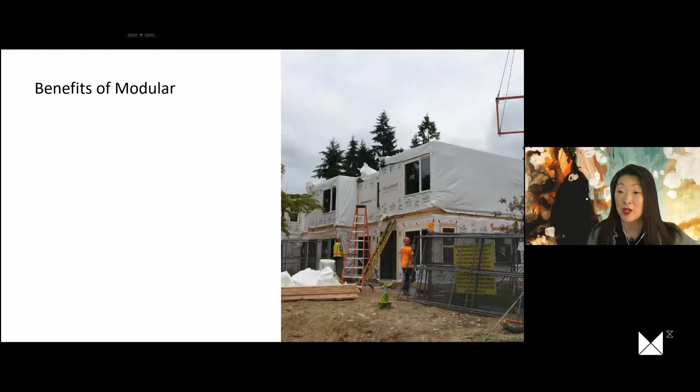And then really quickly, I know many folks watching this might know the benefits of modular, but for newcomers, especially those advocating for new types of construction for delivering affordable housing, there's definitely reduced permitting costs in that you're paying just for the Labor and Industries permit and not the building permit itself. You'll pay for site costs and that sort of limited cost. There is a predictability of construction cost in general, and we'll talk a little bit about that. The construction duration, I'll share with my project, can be dramatically shortened, which means you can house people more quickly.

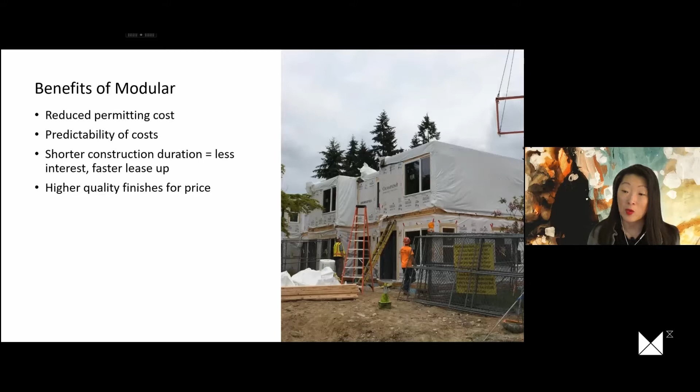The quality of what we got for the same price was considerably higher. I'll try to point those out. And then there's better sound insulation between units. Side to side, in multifamily housing, the sound insulation in site-built is quite reasonable. Top to bottom, the sound separation is not great in multifamily housing, and modular is actually able to achieve much better sound isolation. Controlled environment, so the materials are not getting wet, so there's no dry out period, there's no impact to indoor air quality for the residents.

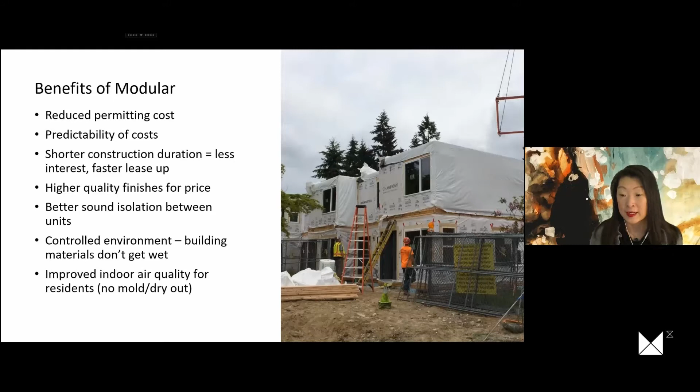And then in terms of affordable housing, I think one of the biggest benefits is the wage rates. I know in our state and city, prevailing wage rates can be quite high. And when you apply those to large scale projects that are $20 million or $10 million, that can eat up a large chunk of the budget. And so the modular companies are able to use their own rates based in the factories wherever they're located.

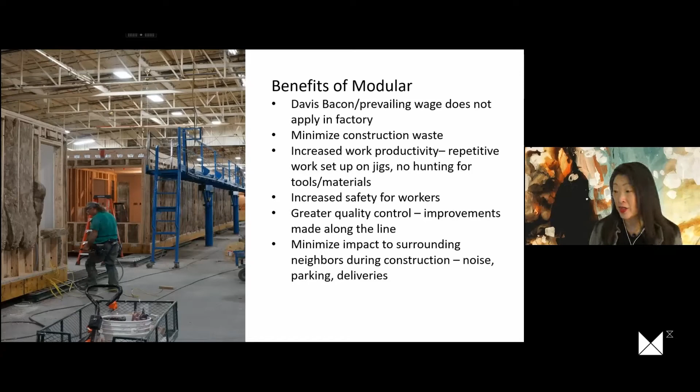So this is the project that I'm going to share with you. It's the Kirkland Avenue Townhomes in Renton, Washington. It is 18 homes, most of them townhomes. There's 4 flats, and they were for families that were earning less than 50% of the area median income. 2 of the units were for previously homeless veterans, and 2 of the units were barrier-free or accessible.

So one of the key things about this project is that from the beginning, we knew that this would be modular construction. The owner had a strong desire to do that, and so we were prepared and ready. The standard dimensions for trucking is what we worked with. These were the ideal numbers given to us by various modular vendors and trucking companies. So ideally, we would be working with units that are 14 to 16 feet wide, a planning dimension of 30 to 35 feet deep. And we did this because we knew these were going to be stacked units, and we weren't doing a double loaded corridor situation.

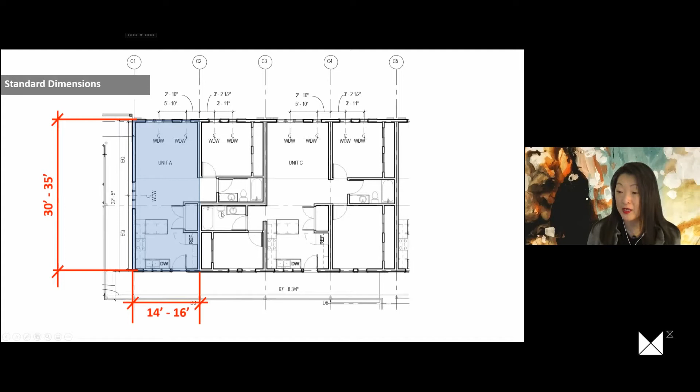And so we knew that if we put 2 of these units side by side into a single trailer width, then we could reduce the costs of shipping. So we were trying to maximize one load. So we designed this into bays. There's a living bay and then a bedroom bay. And in this case, this is a 1-bedroom unit nested in with a 2-bedroom unit, but they're all made up of individual bays that are, I think in our case, 14 by 30.

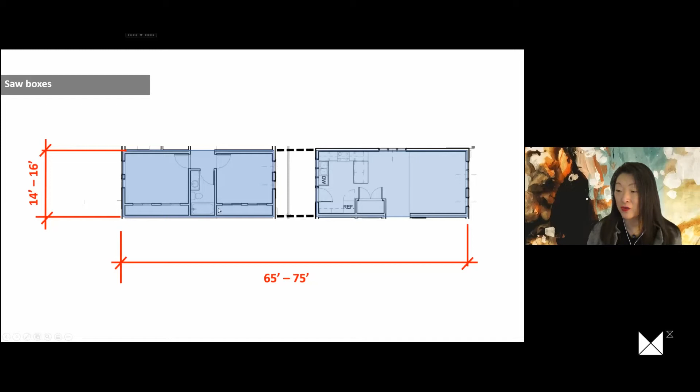So this is how the saw boxes were put together, side by side, kind of in a linear format. And these were actually 1 unit. So this unit could stack on top of this one. This was the flat, not the townhouses. And then these dashed lines are the portions that get sawn away. So we had about a 68-foot dimension for ours. So this is the living module, as I mentioned before, and then this is how they could get combined into a 2-bedroom. So this is just kind of a simple planning exercise.

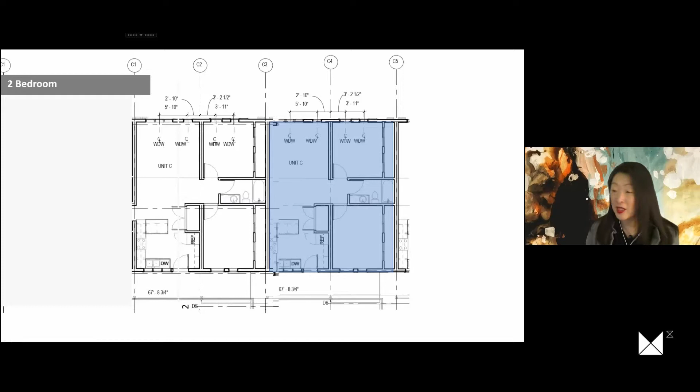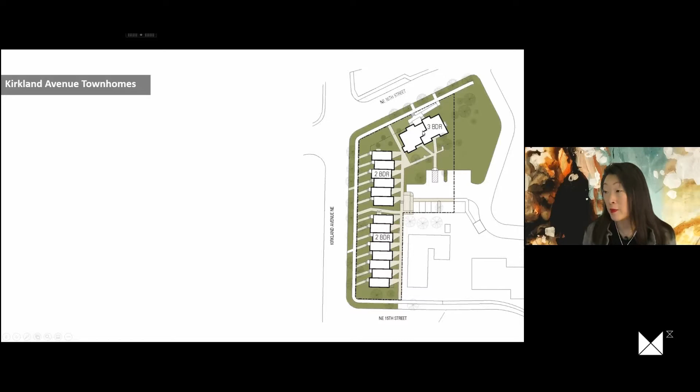Got ahead of myself and shared the way that those nest together. This was our site, a little L-shaped site that was at the corner. So the townhouses face Kirkland Avenue, which is the main street, and then 16th was a side street. And the 3-bedroom units were stacked, and the stacked flats were on that 16th Street side.

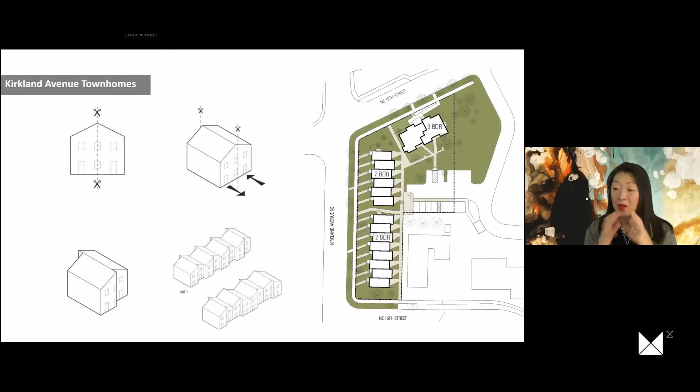Architecturally, the concept was to create a sort of simple archetypal house. And then we sort of split it down the middle and modulated. We thought the width of these units being only 15 feet wide or 14 feet wide was too small to do a series of gables, one next to the other. So that was how we achieved sort of that familiar residential character, and yet we pushed the facades back and forth to articulate the individual homes.

In terms of documentation, because this was a public housing authority that we were contracting the work through, they had a procurement requirement to go out for competitive bid. And so while I wouldn't recommend this for all projects, in the case of ours, we needed to do competitive bids. So we made it very clear in our documentation what was field work and what was in the factory. 90% of the work was going to be done in the factory.

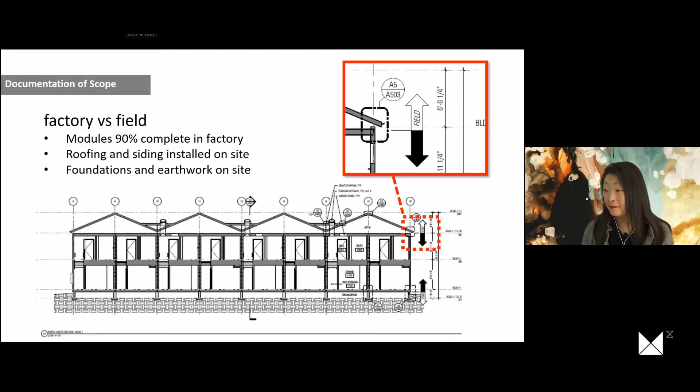The roofing and the siding, we wanted it to be done on site so that the envelope was one scope of work that the site contractor would be responsible for. And then the foundations and the earthwork were also part of the on-site contractor's scope. In terms of the documentation, you can see I've blown up here how we indicated what was work to be done in the field and what was the work to be done in the factory. That goes for the foundations as well. And we did that all throughout with the details as well. This is the site work being prepared.

And at the same time, the construction was happening in the factory. And this was kind of the way that our particular factory went through their sequencing. So there was station one and it would move across and then it would be rolled down, and then it would move its way across and sort of work its way down. So that was kind of our factory's way of working and producing so that in 7 days we would have a complete box or a complete module.

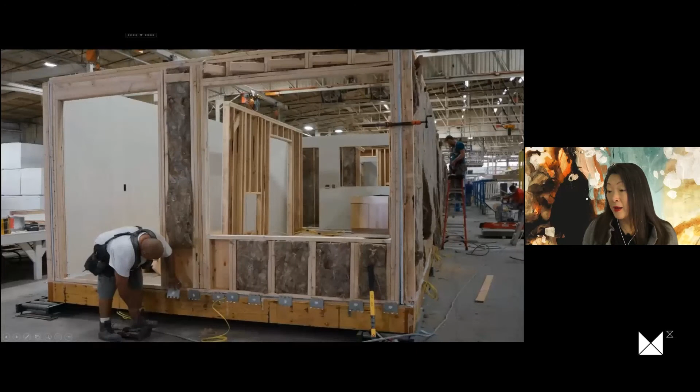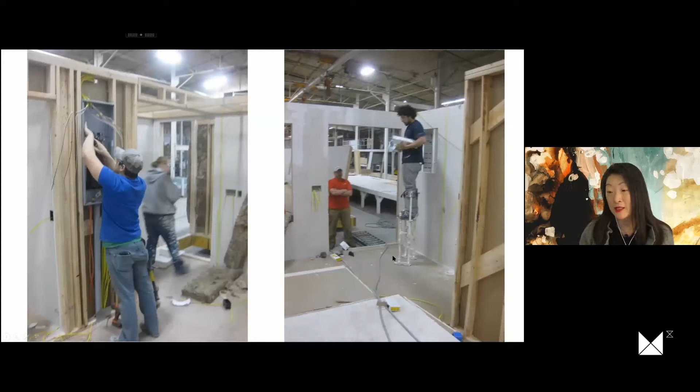This is the factory as they were doing the work. So you can see this is the side-to-side movement that I was mentioning. Platforms being built here, raised up so that the plumbing and infrastructure work could be placed, and then combined with the pieces coming down on the rollers. This is some of the work on the rollers that was occurring. And then the interior finish work at the sort of last phases of the line.

This was one of the units kind of towards the end of the line, a little bit rough still because they were still not done finishing. They have some protection board on the ground so that all the mud and tape and stuff was happening on top of that surface. This wall was left open during shipping. You can see a little piece in the ceiling. That was the connection to the bathroom upstairs. Yeah, I think that's kind of the big thing to point out.

Our install took 4 days, and there were folks that lived across the street, had lawn chairs set up. They were watching. There was somebody that made a comment that when they left for work in the morning, there was nothing there, and at the end of the first day, came home and was surprised that there were homes literally constructed in front of his house. So this is what I meant when I said that there's less disturbance to neighbors.

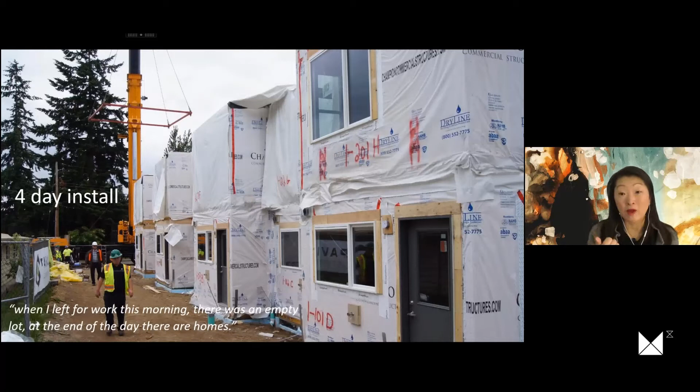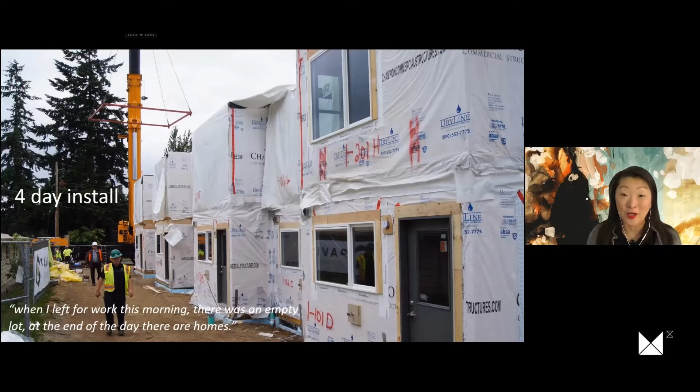I think one of the biggest impacts of on-site construction is the noise, the lack of parking or the congestion, and just the delivery vehicles and all of that. So, no hammering and nail guns going off at 7 o'clock in the morning, no delivery trucks backing up and beeping to drop off large pallets of wood, and certainly not the disruption that usually happens for months leading up to a construction of homes.

This is what it looked like after they left. The roofs were framed and installed on site. We could have done that in the factory. The contractor chose to do that as site-built trusses that were trucked in and put on top. Before the roofing, this is how the units were delivered.

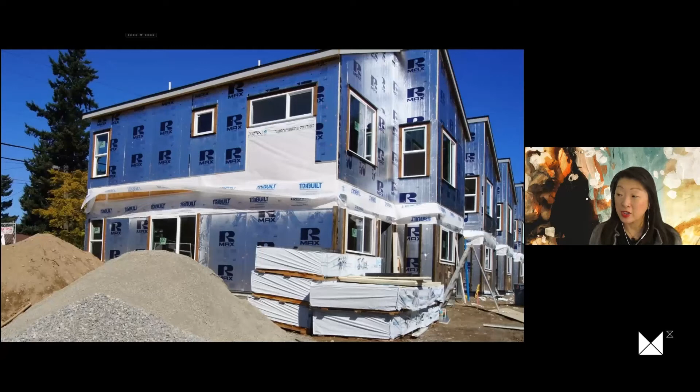The exterior, we chose to do additional continuous rigid insulation on the exterior in addition to the insulation in the walls, and then the siding going in, and then the finished project. And we were able to save enough of the mature trees on the front side of the street so that it actually has quite a good feel.

A couple of myths to debunk. Modular is not necessarily cheaper than site built. I think the biggest cost savings is achieved if you are able to be closer to a modular factory. And this is one of the reasons for increasing production, so that there could be more factories built closer to the sites. We used to have a factory right before the big recession in 2008. And that factory had mobilized and geared up with a lot of new state-of-the-art equipment, and then the market fell out and they had to close. And so we had to get our modules from Idaho.

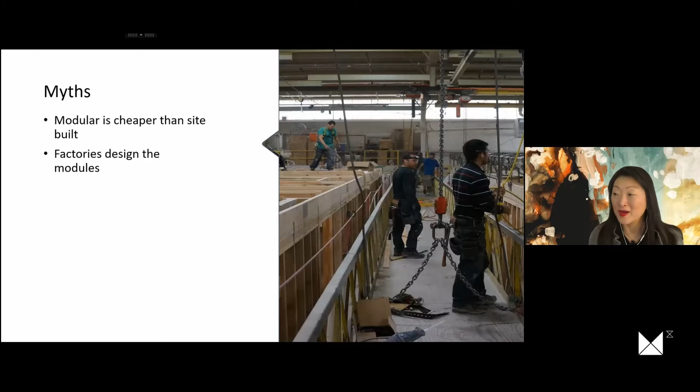Factories design the modules. The architects design the units, the homes. We just worked with the factory and trucking dimensions to make sure that what we were designing was efficient and cost effective. It is a myth that the construction quality is inferior.

In fact, there were a number of cases. Normally for this type of project, for an affordable housing project or any multifamily project, we usually have plastic laminate countertops. We got solid surface. We usually have hollow core doors. They were all solid core doors. So the quality of the product going in for the same cost is much higher. And that's what we found universally, because the modular vendors have buying power because they're producing so many more units.

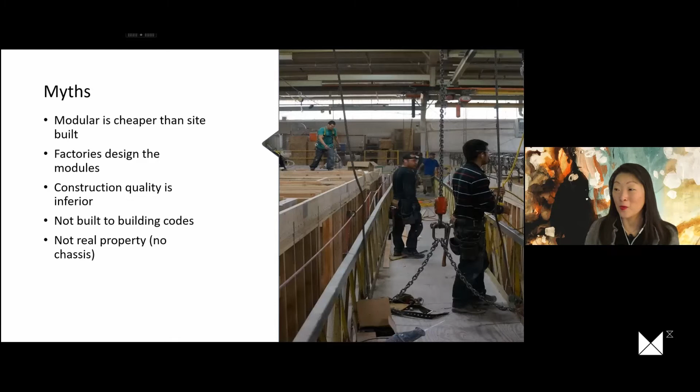The modules were built to IBC standards. You saw the drawing sets. We went through permitting through the city of Renton. L&I did permit the modules themselves, that they were all built to IBC standards. And they are real property. There is no chassis, as you saw. These modules are just wood bottoms. They were rolled onto in the factory, and they were craned in place.

Some of the challenges to think about is that design decisions need to be made early. When we work on affordable housing projects, or even any multifamily projects, there's a tendency for the client to defer and wait to pick the final colors and finishes during construction, either for market reasons, because they want to pick the latest and greatest finishes that are on par with the market, or just for expediency, wanting to delay some of the decisions till later. So all of the decisions really need to be made during early schematics and design development.

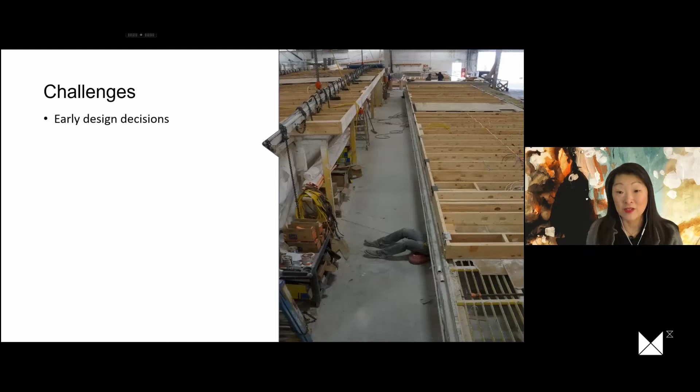It's beneficial to have an understanding and familiarity with modular design among the design and construction team. That way you're not trying to fit a round peg into a square hole with designs of units that are 20 feet wide, or I should say more like 18 feet wide, and trying to figure out how to make them more efficient. It's always possible. It just may come at a higher cost. So working within the modular shipping widths is ideal.

Modular might not work with the owner's procurement in the case of affordable housing. In the case of our client, the Renton Housing Authority had some capital that they could access so that they could front load some of the requirements for paying for deposits with the modular company and for the first draw for the modular vendor. They were then reimbursed as soon as construction happened on site with the first draw request. The first draw was quite a big one. But not all owners have that ability and have that capital to work with.

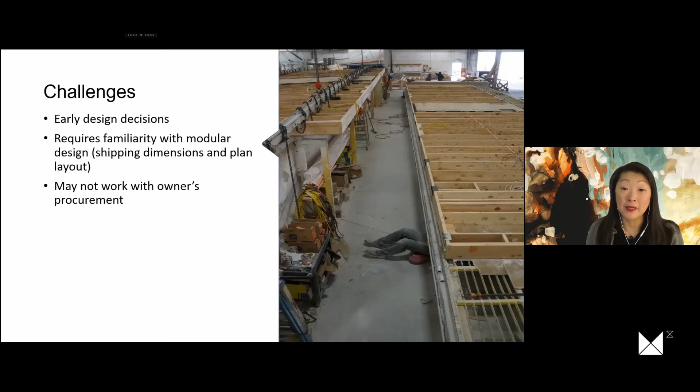So the large deposits and the timing of the lender funding. Also, lenders for affordable housing projects often want to see the material installed. So with a big portion of the construction happening in a factory and not on site, there was great hesitancy from the lender. The materials stored off-site was not an option, and that's why the owner had to front load and pay for some of those costs up front.

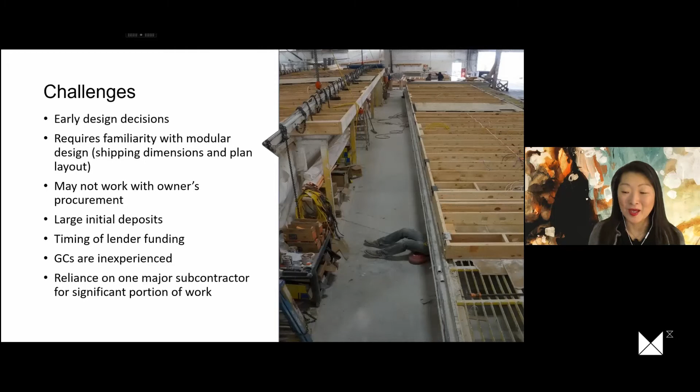Another challenge is that there's not always an experienced pool of general contractors who have done modular construction, or even if they've not done it, that are willing to do modular construction. So just getting the general contracting group interested in doing this kind of construction is important. And then there's a hesitancy and a concern of relying on one major subcontractor, which is the modular vendor, to do a significant portion of the work. The contractors that are willing to come on board have to get over that one big hurdle themselves.

Some lessons learned: assemble the team early. Make sure that you have the general contractor, the architect, the modular vendor, all lined up at the beginning. That way they can work in concert as a team, as opposed to trying to bring someone along afterwards.

In our case, it was bringing along the general contractor, which was challenging and difficult. Make sure that the design team is modular friendly, as I mentioned. So just kind of listing out the parties or the team members. And then having early communications with the funders and the lenders for affordable housing, even more so important to make sure that the finances are sort of thought about and the sources and uses are contemplated before entering into this agreement.

And I think that might be my last slide. Let's see. Oh, nope, I just was stuck. So the other, oops, now I'm gonna have to go there again, sorry.

The other challenge is documenting all proposed change orders. This is a standard thing that happens in on-site construction. When you're in the factory, it becomes a little bit harder to do, partly because the modular vendors aren't used to doing it. And so an agreement might be made on the factory floor. Those need to be documented in the RFI process so that the general contractor is aware of them and that it gets carried through in terms of costs and things like that.